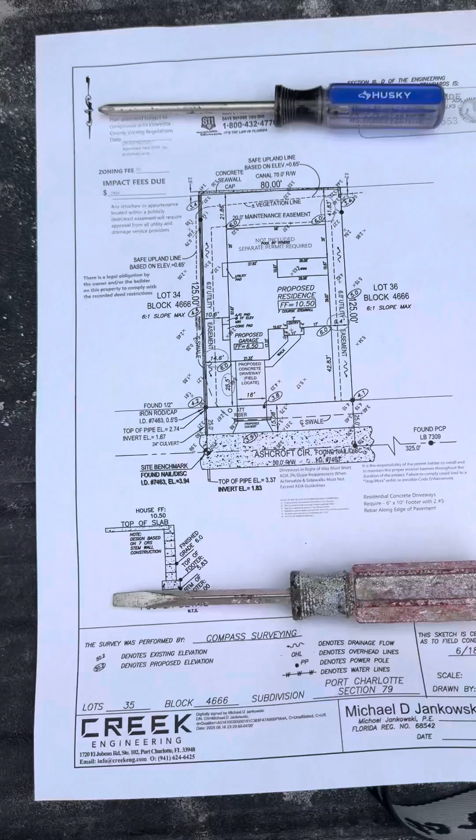This is our site plan survey. Everything that is needed in order for us to begin our construction is denoted here on this plan. As you can see, we're standing right in front of the project site, and we just completed what is called the hub and tack survey.

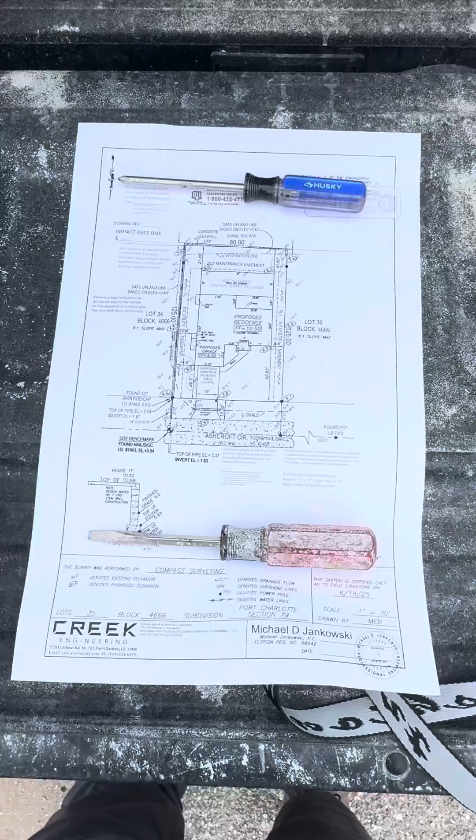The hub and tack survey is what marks the four corners of our building pad, as you can see with the orange markings here. It marks the four corners of the building pad and the actual elevation, the finished floor elevation.

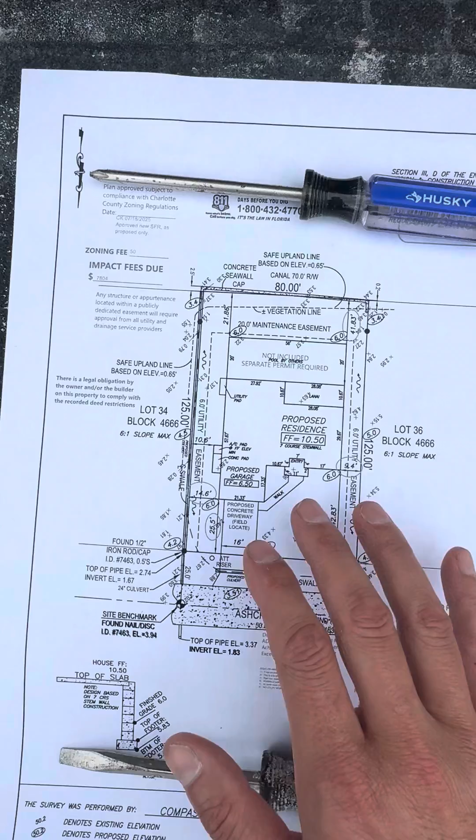Now, the reason why I always tell people that the most important document in your construction project is your site plan is because this document, believe it or not, has everything that you need to know in order to complete your journey in construction. So this is kind of like the keys to the kingdom, where the treasure chest is, and the treasure chest is going to be the fully completed home once it's finished. So the most important items that we want to consider right now, there's a couple.

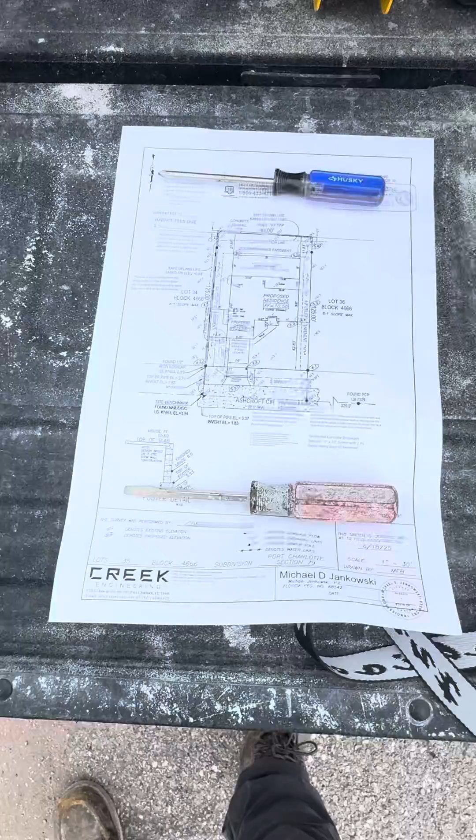So the first thing is, as you can see here, we have our finished floor elevation of 10.5 feet. That means that the height of the slab, where the tile is going to go, where the block is going to go, everything is going to be at 10.5 feet above sea level. Everything in this market in Southwest Florida is measured above sea level, and so that is the number that you see here. FF stands for finished floor.

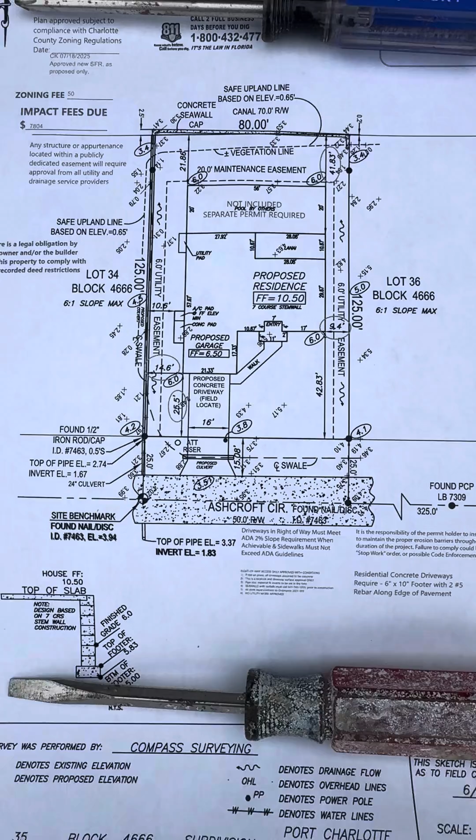Important to consider here, we have our benchmarks. Our benchmarks are what is used as a reference. The reference elevation is taken on the crown of the road. The survey crew comes out and they mark using certain points that they put in the road, certain nails and discs. They set them down and they take that elevation, and that is our reference point to be able to know how high we need to come up here.

And so as you can see, we have a reference point on the right hand side of the property and on the left facing side of the property. Let me show you those. So on the right hand side of the property, here we are standing. We have the benchmark elevation denoted here in orange. This is 4.2 feet. And so this tells us that if we were to take a grade rod and set it right here, this elevation is at 4.2 feet.

So as you can imagine, if we need to come up to 10.5 feet, we need to come up approximately 6 feet, 6.5 feet in order to get to our finished floor elevation. So this is the starting point. In addition to that, our survey crew also comes out and marks the left and right hand corners of the lot. And this is important because you want to know where your lot begins and where it ends.

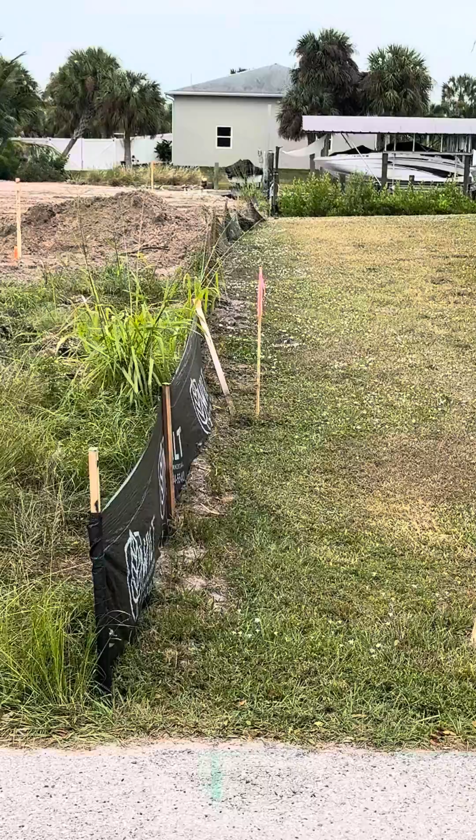Our lot begins here. As you can see, it goes back through the pink flag, which was just put down. And this is essentially the right hand line of the lot. And so if you can imagine, the right hand line of the lot will be here, and the house will begin somewhere over here behind the porta potty where those orange flags are.

All of the lots here in this market are 80 by 125, so that's 80 feet of width by 125 feet of depth. That is a standard 10,000 square foot lot, give or take. Some are a little bit smaller, some are a little bit bigger, but roughly about the same. Here on the left hand side, we have our other benchmark of 4.05 feet. And so this is another reference point that we can use in order to take our finished floor.

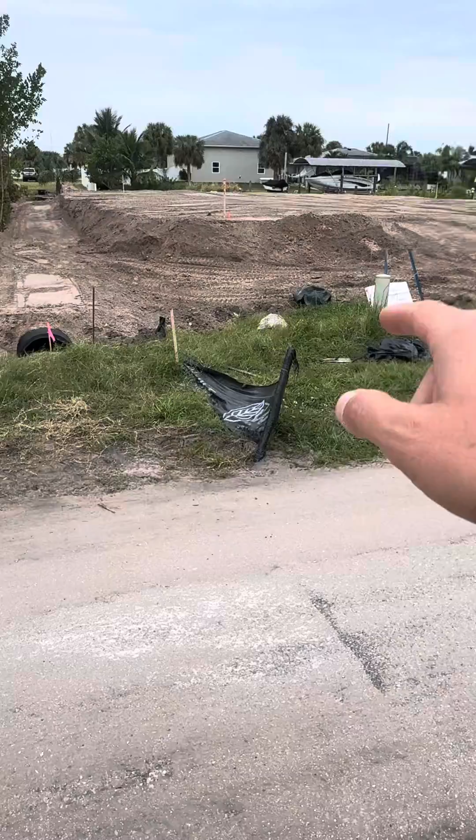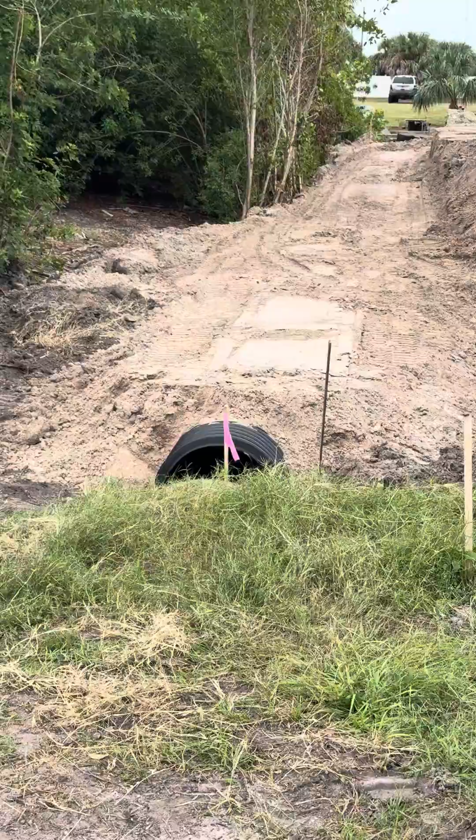Some interesting aspects of this build to begin with, we have, as you can see, an outfall pipe that we had to install. The outfall pipe refers to a culvert pipe that we had to put underneath the area here on the left hand side of the lot. This lot, give or take, around this area was actually at 0 feet of elevation, believe it or not. And so when it would rain and the tides would come up, the water would just pool in this area.

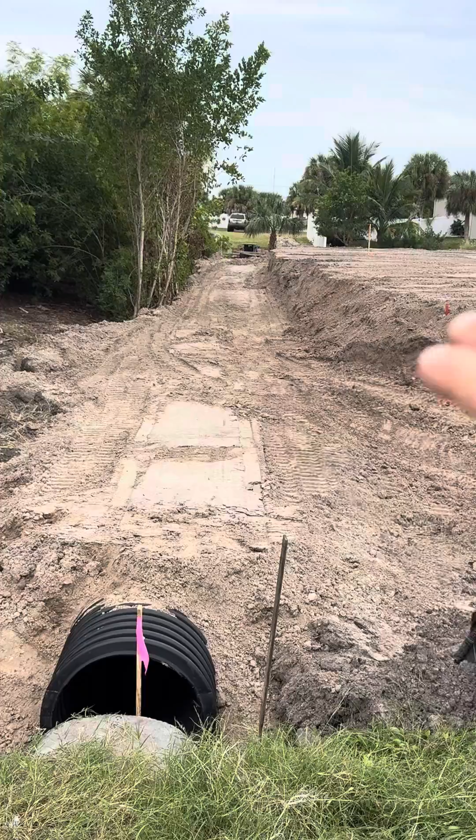And so Charlotte County requires us to put an outfall pipe if we're not able to meet the actual rise and run, so the slope of the house. If we're not able to meet the slope, meaning essentially what they want is that for every 6 feet that you walk, you don't rise any more than 1 foot. So what they don't want is for you to have a house with a super steep slope.

And so the way that we're combating that, or just making our life a heck of a lot easier, is by putting this outfall pipe. Because if you can imagine, the elevation of this lot actually was down here, somewhere in this area. So if I get closer to it, you notice that given that we put the outfall pipe, now look how much higher we are.

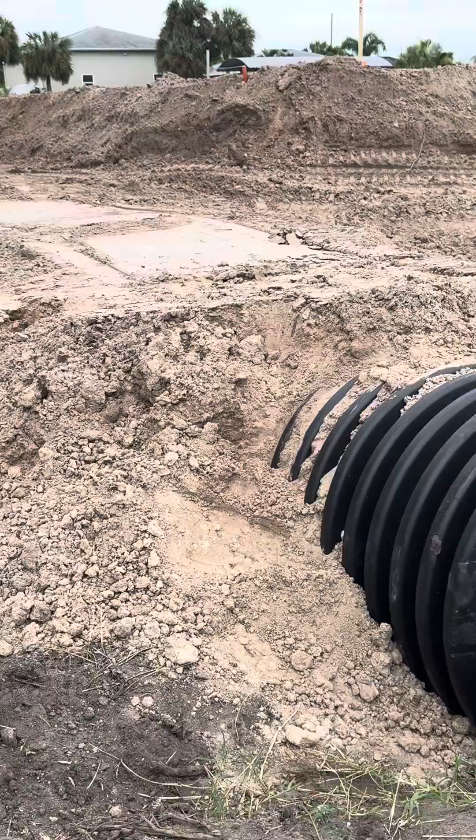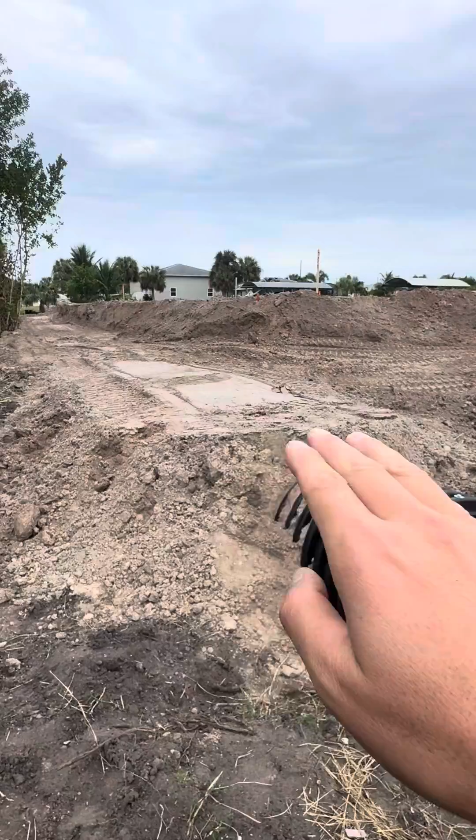And so it makes our life a lot easier because we don't have to meet that slope requirement anymore to this elevation. Now we're up here, and so it's a little bit easier to meet it. So in this case, we set that, and now that we have set that, we're pretty much in the clear. We don't have to worry about that.

This is where the water runs from the front of the property, actually even from across the street. As you can see here in the swale area, the water runs through here, comes underneath this outfall pipe, and it drains out to the saltwater canal behind the lot. So this was a very important point. We had to pay for this to clear, trench, set the pipe, everything. That was part of the requirement for our lot here.

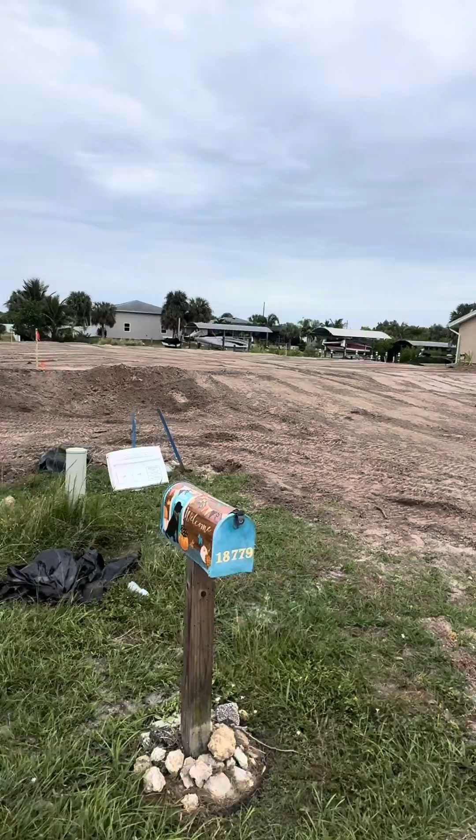So something for you to consider if you're building: pay attention to any swale areas that you have on your property. As you can see on our site plan, again, the most important document, we have a utility easement, and it denotes right here top of pipe. So it denotes that there is a pipe coming out through here. That's what we finished off here with our outfall pipe.

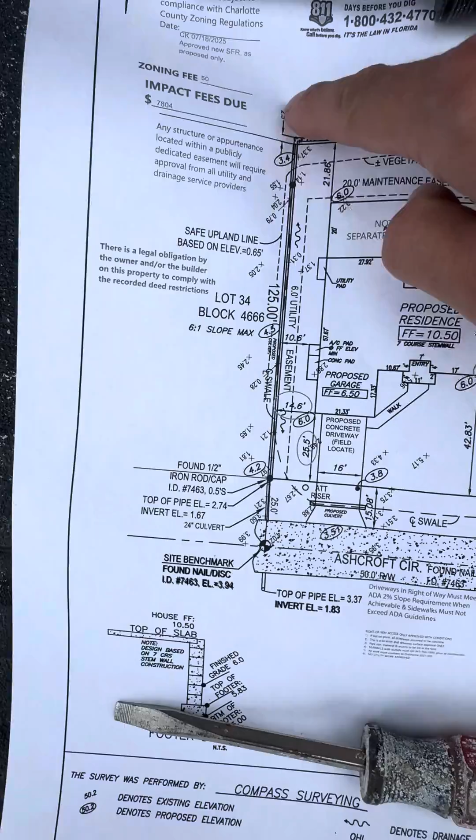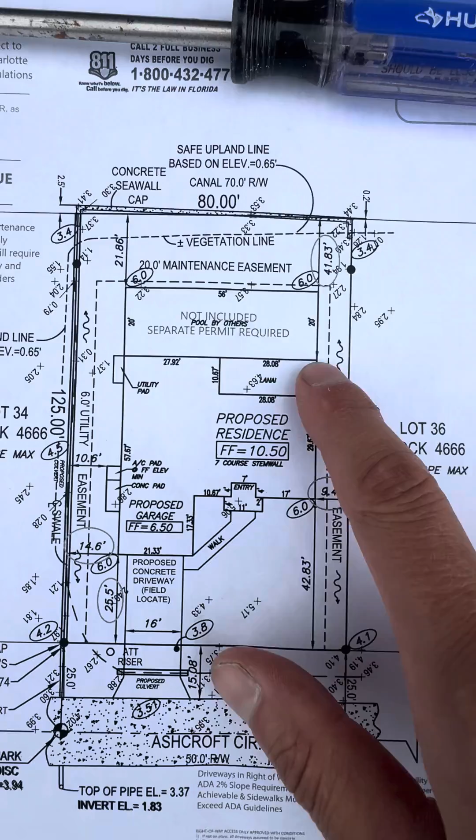So now that we covered that, we can talk about the four corners of the lot and the purpose of the hub and tack. The hub and tack is important because it denotes the exact corners of where your house is going to go. So it's going to be this corner, this corner, this corner, and this corner. And if we come out here to our project site, you notice that our survey crew already marked those four corners, all with the orange markings.

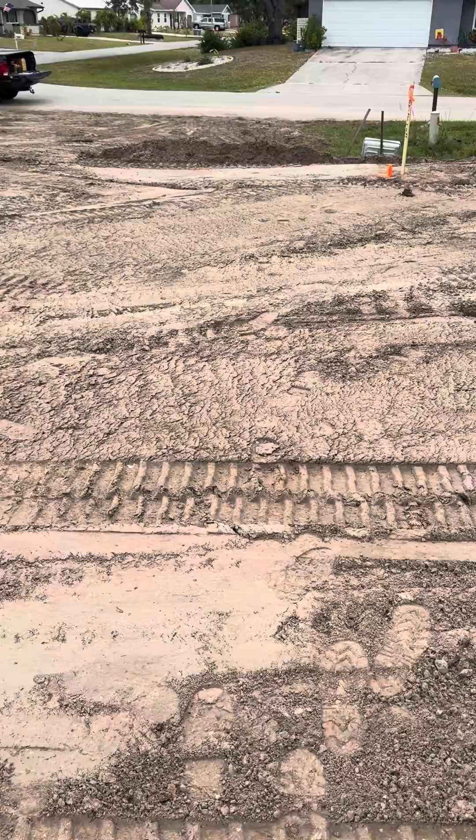Now, our pad is already elevated. We have set our pad here in order to begin our construction. This home is going to be built on what is called a stem wall. For those of you who may not be as familiar, normally when you pour a traditional home's concrete pad, you are digging your footers and placing your rebar at the finished floor elevation, and then pouring your concrete pad on top of that as one continuous slab. The term mono slab means one continuous slab.

This project is different in the sense that we have to pour the slab in two parts, and the way that we do that is by doing what is called a stem wall. The stem wall here is required primarily because we have a high elevation. We have to come up 10.5 feet here above sea level. So in order to ensure the structural integrity of the project, we are doing a stem wall, and that was required by the engineers who did our site plans and structural plans.

So the way that we run the stem wall is, at this phase of the project, we need to put the stem wall at 6 feet above sea level, and that is denoted in our site plan that I have in the back of the truck. 6 feet above sea level is right now where you see this dirt right here. So if you were to take a grade rod and set it right here at this elevation, you would be approximately 2 feet above the crown of the road.

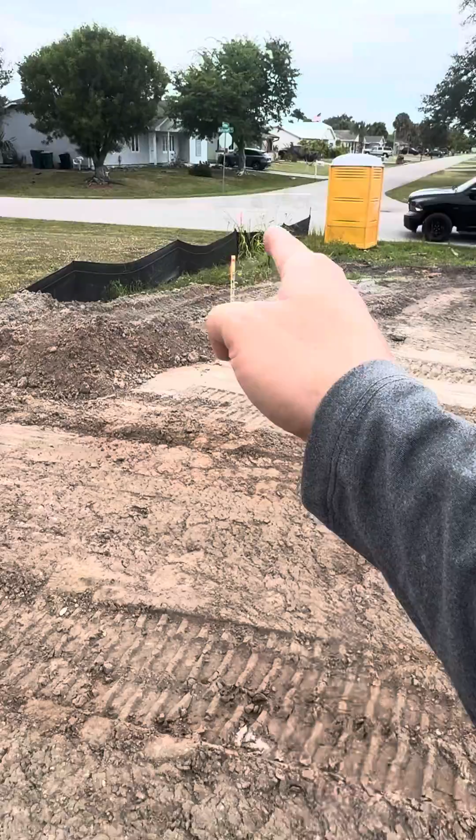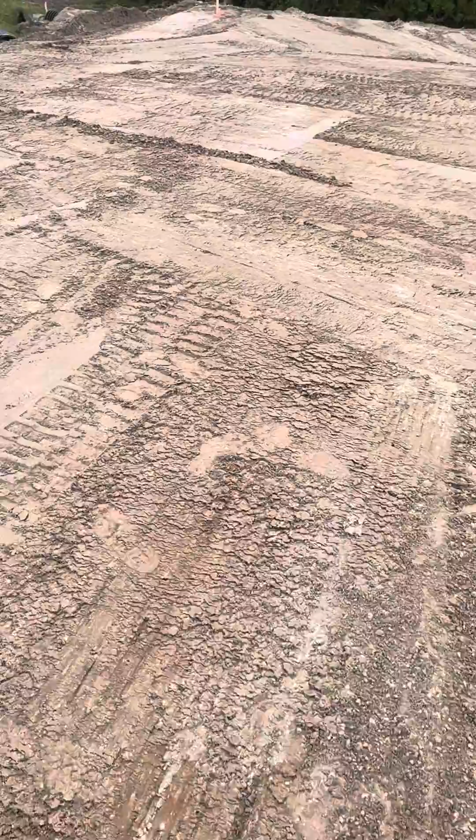Again, remember, the crown of the road was approximately 4 feet. And so that is our benchmark. We always go back to the benchmark. That is how we reference elevation for our project. So our building plans call for a stem wall at a 6 foot elevation, again, 2 feet above the benchmark.

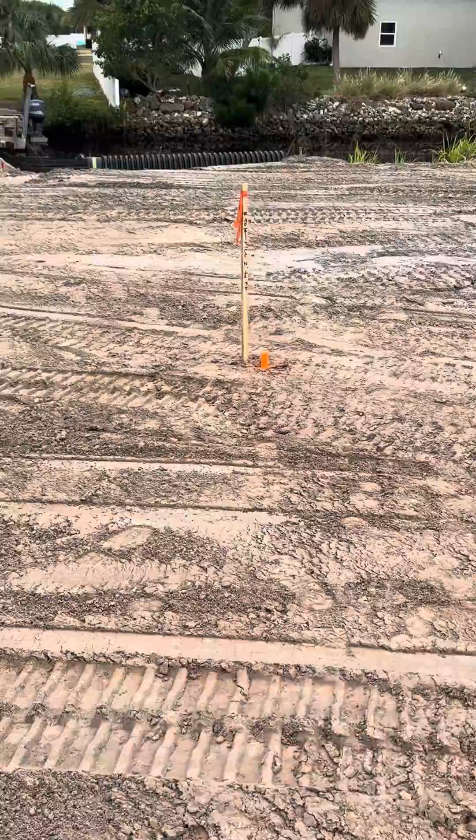And so what we're gonna do now is we're actually gonna dig a footer all along the perimeter of the house. That footer is going to be encased with 3 number 5 rebar. The number 5 rebar is going to be placed parallel to each other, 3 of them side by side, 1, 2, 3. You can imagine it, it'll be here like this, 3 all along the perimeter. And then we will come and we will pour that footer. We'll pour the concrete on top of that footer. Once we pour the concrete on top of that footer, then we have our base.

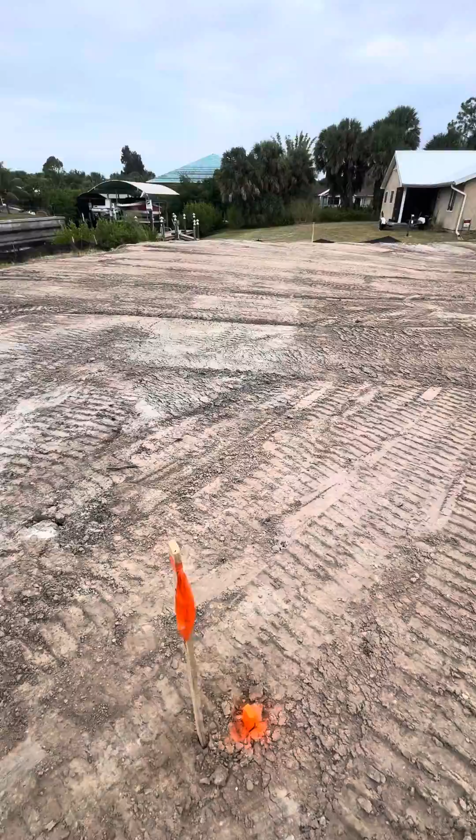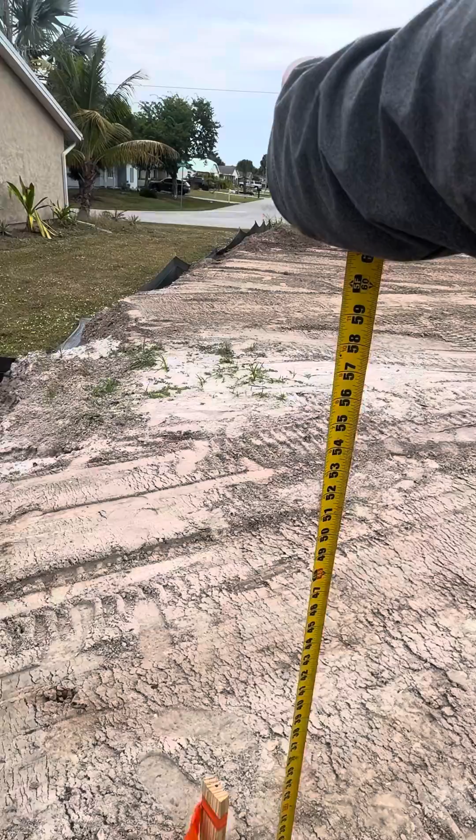From there, we have to come up what is called a 7-course stem wall. This means that we have to come up 7 layers of block. Those blocks are going to be placed on top of the concrete footer that we already put. As you know, a concrete block is 8 inches by 8 inches by 16 inches. And so if you multiply the 7 by the 8 inches of height, you're going to have a wall that is going to measure 56 inches. So we're gonna have 56 inches of block right here. So you can start to appreciate how high up we're gonna come with our block.

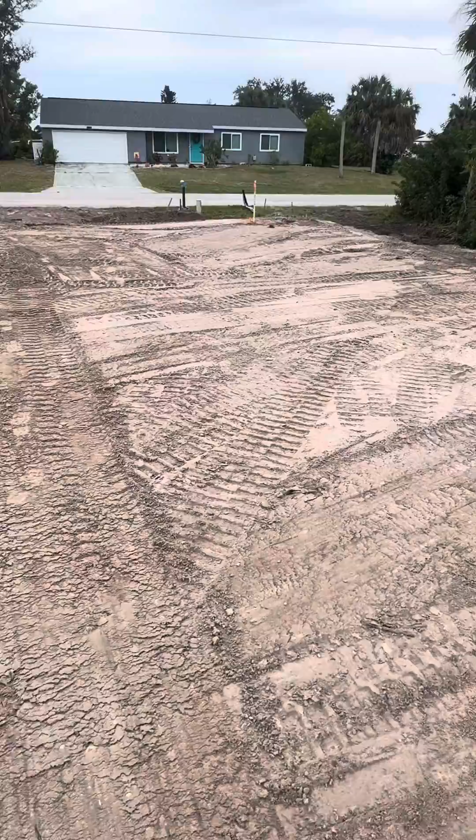So now we're gonna have the footer poured, we're gonna have the first rows of block. And so essentially, if you were to drive up once we're done with the block, you're gonna see just a bunch of block around the perimeter, 56 inches high. Inside of that box that we've now built, we're gonna come in and we're gonna backfill it. And so we're gonna backfill it all the way up to the 56 inches of height minus the 4 inches that we're gonna put of concrete. So actually we're gonna come up to 52 inches. 52 inches of backfill, leaving us 4 inches for the concrete slab. That is the point where we're gonna go ahead and pour the mono slab on top of the base that we just built, essentially with our stem wall.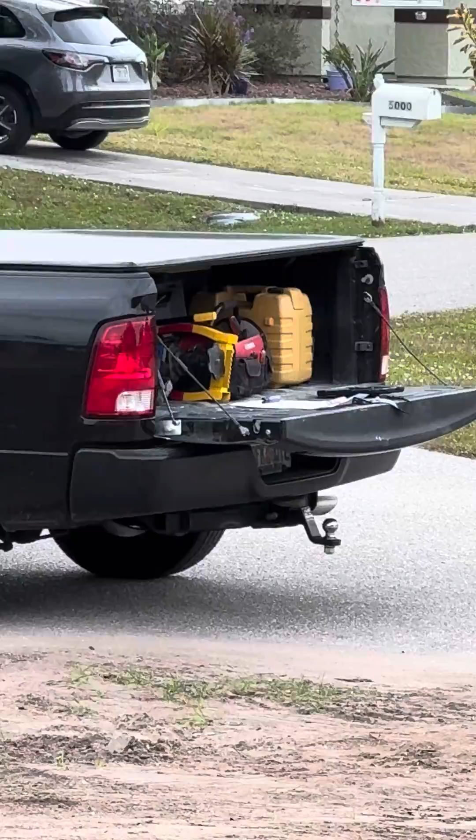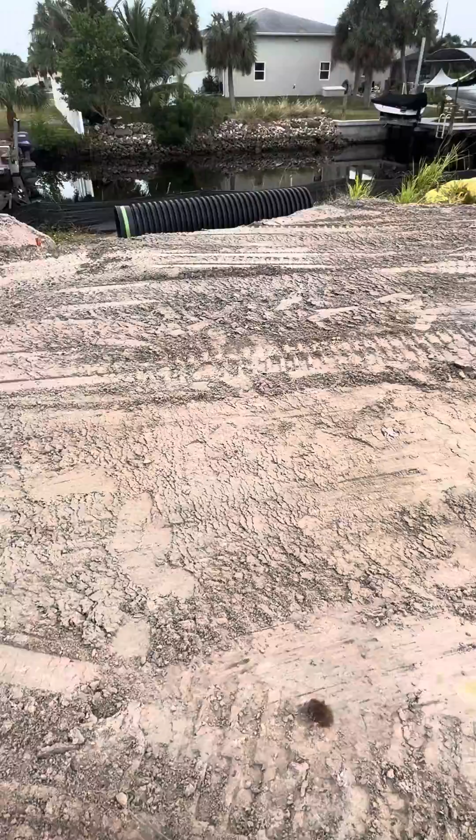Every time that I come out to a project site, I always bring my grade rod, my laser level, as you could see in that orange bin in the back of the truck. I like to trust, but I also like to verify. I think that is a key role here as essentially the super of the company, if you will. I play a lot of roles and I wear many hats, but the most important hat that I play is to ensure the accuracy of the construction. That is how we have been able to avoid major issues and costly mistakes. Of course, construction is filled with mistakes, but it's our job to be able to catch those quickly and be able to correct them as seamlessly as possible. And so that is essentially what we're going to be doing today. We're going to be measuring this, and we will be on our way, and we'll be getting ready to dig our footers and pour for our stem wall.